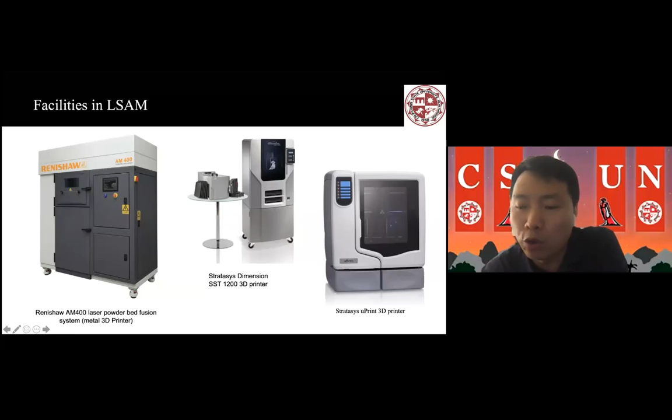This was funded by the DoD, a $500,000 grant, and then we purchased the Renishaw AM400. This is the metal 3D printer that uses laser, and then this is Stratasys Dimension, U-Print, all these different SLA printers, the ThermoJet, and also the desktop 3D printer.

I think that will be more familiar to you. Right now, from worldwide, a lot of universities have these desktop entry level 3D printers. And in the US, even high schools and middle schools have purchased these 3D printers for students.

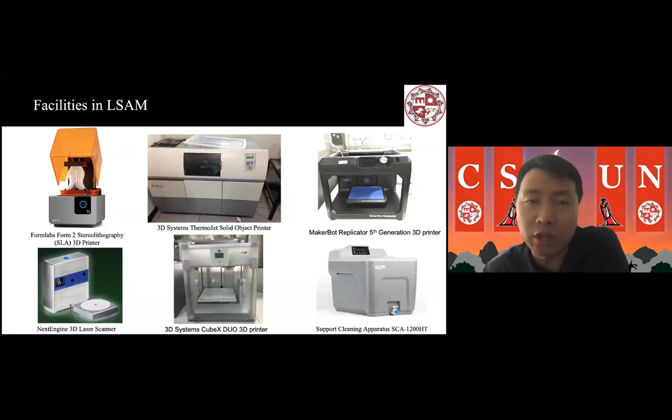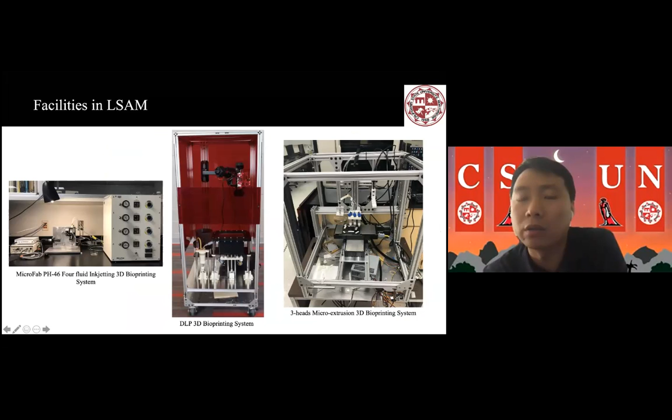For their projects. And these are the 3D bioprinters we developed in our lab, built by our students and my grants. So we just built these. You can see our 3D bioprinters from scratch, we designed and manufactured 3 different 3D bioprinters. And these are the equipment we purchased for my cell culture because I'm working on 3D bioprinting.

So we have to grow the cells and then put the cells in the hydrogel. I will show you details later, like how we are working on the 3D bioprinting. This is a new emerging research area.

Next, in my research I divided it into 2 sections. The first one is 3D printing, and design for AM. These are some of the grants supporting this research area.

I think you are students, most of you in industrial engineering major, right? Yes. Okay, all of us, IE students. So I think maybe you already have knowledge of 3D printing, additive manufacturing.

This is the definition. I think they have different definitions from different countries or different groups of people, but this is the definition of 3D printing from ASTM in the US. So typically AM means the process of joining materials to make an object from 3D model data.

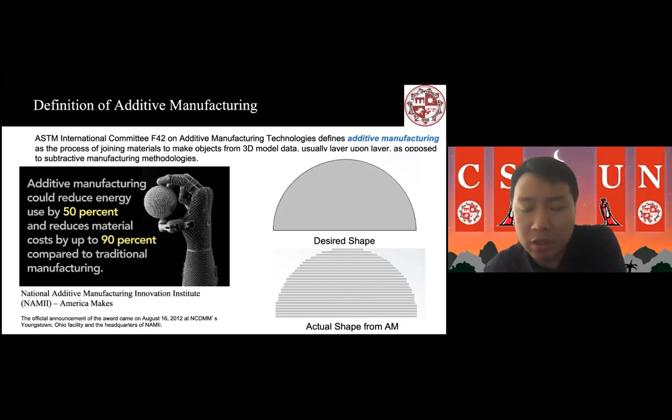Additive manufacturing has a lot of advantages. They can reduce energy by 50% and materials cost by 90%. So these are the different 3D printing technologies like inkjet-based, SLA, extrusion-based, SLS, FDM, the laser-based.

I think you may be familiar with them. If you're not, later in the Q&A section I can give you more details if you have any question about each of the technologies. But here I just want to give you a brief introduction.

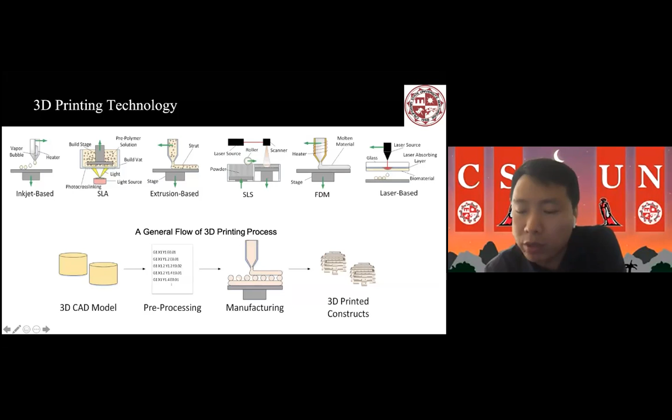The 3D printing process itself starts from the model. You build a model in different software, SolidWorks, CATIA, Autodesk Inventor, Fusion 360. Then there's the pre-processing, where they generate G-code, then the manufacturing process, and then the 3D printed construct.

So next I'm going to share all the projects that I'm doing, either that I have done or that I'm working on now.

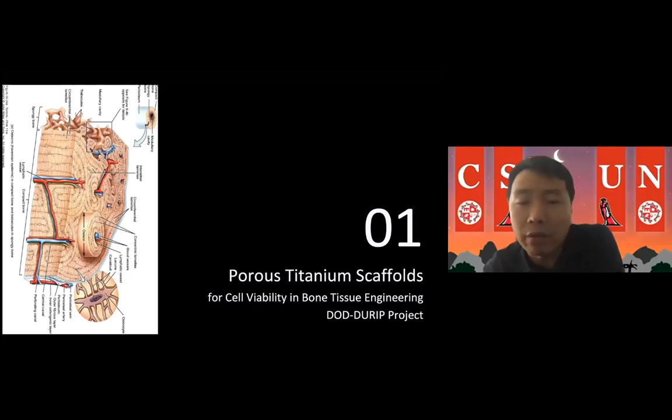To show the different projects, so you'll have a better idea of the current research in the United States, the first one is the most recent project in metal 3D printing: the porous titanium scaffold for cell viability in bone tissue engineering.

This is the bone tissue structure. You may be familiar with, or have a basic idea of, the bone structure, even from your high school biology class. The purpose of this research is to mimic or simulate the bone structure, especially the porosity.

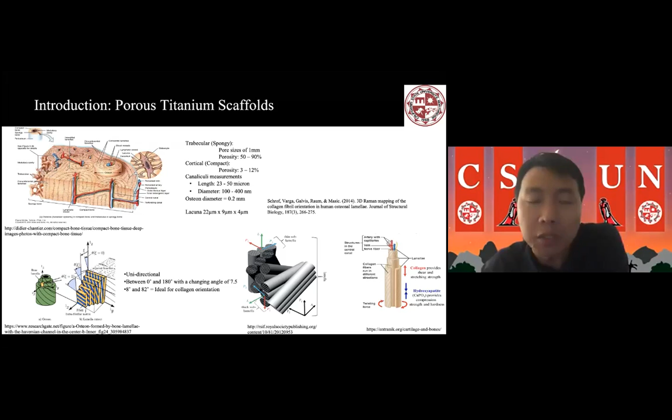Here you can see more detail, like the compact bone tissue, and the spongy, porous scaffold or porous structure.

Our design methodology uses 3D software or modeling to create structures with multiple porosities similar to human bone. I won't go into detail on how we chose 300, 400, 500, but if you have questions you can ask in the Q&A.

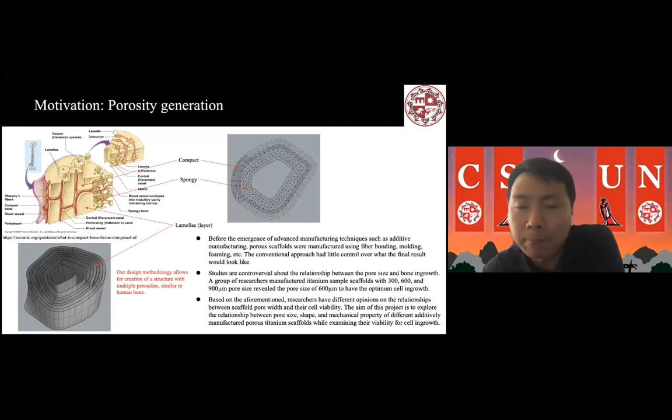Here's what we did: we designed in the software using Rhino and Grasshopper with IntraLattice tools to create these 3D geometries and structures.

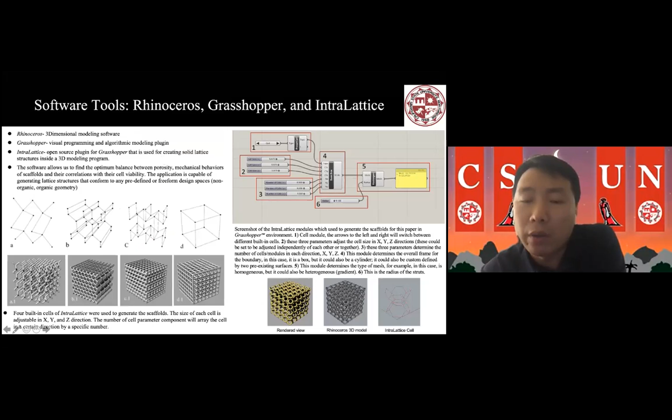Then we test them. We build them in the 3D modeling, picking different variables of the structure and scaffold. The pore size is 300, 400, 500 micron.

For cell geometry, we picked four types: diamond, honeycomb 1, honeycomb 2, and grid. Then we generate a 5 by 5 by 5 millimeter cube.

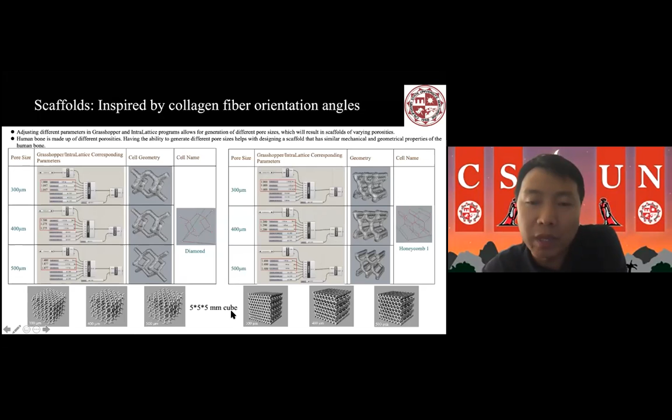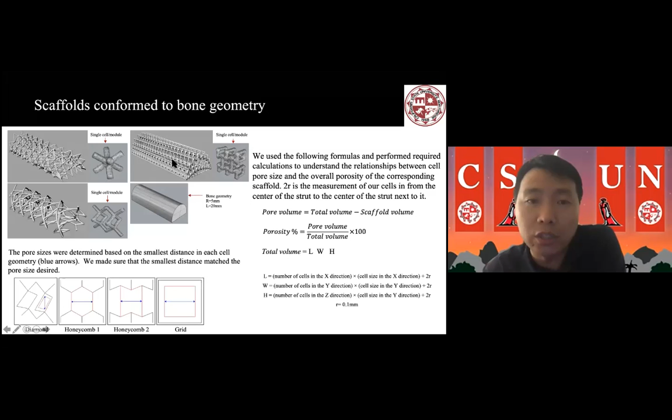We generate these different structures in the software, and also mimic the bone shape for this semi-bone shape. Then we calculate the porosity for each geometry, for each structure.

Then we use the metal 3D printer. Since my 3D printer hadn't been installed yet at that time, I used my partner's metal 3D printer, the Concept Laser M2, to print out all these different samples and scaffolds. I can show you more details of this later.

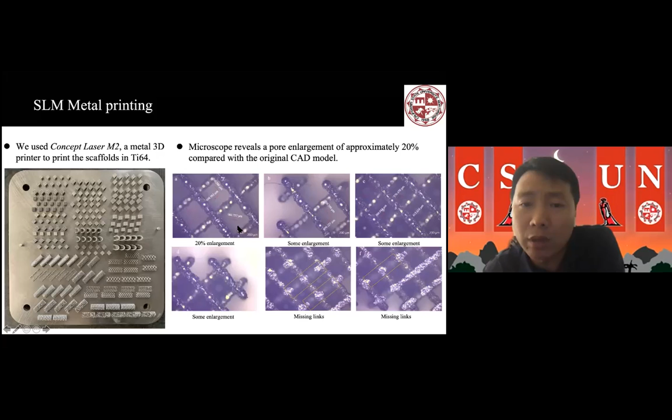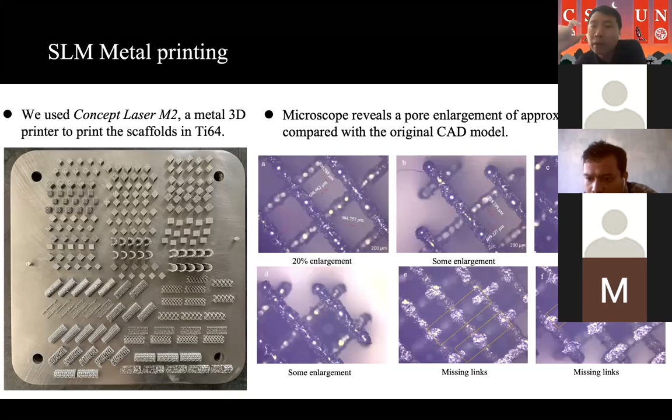We used a microscope to look at the structure and also the deformation, because slicing in 3D printing causes a lot of deformation, like enlargement and missing links. Here there's about 20% enlargement - your design is 300 micron, but the real size may be larger than that.

We also took SEM images to look at the internal structure at the micro scale, so we could understand the internal structures based on the build and fabrication.

You can see this is honeycomb 2, honeycomb 1, and you can clearly see some missing links and deformation. The initial shape in Rhino is a perfect, great honeycomb or diamond, but after printing there's a lot of deformation.

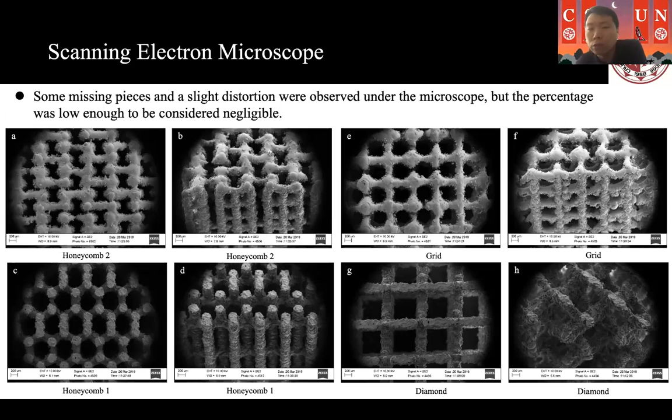But the reason we don't care about this rough surface is that it's for bone tissue - the cells will attach to the surface and grow into tissue, so we don't need a perfect surface finish for this project.

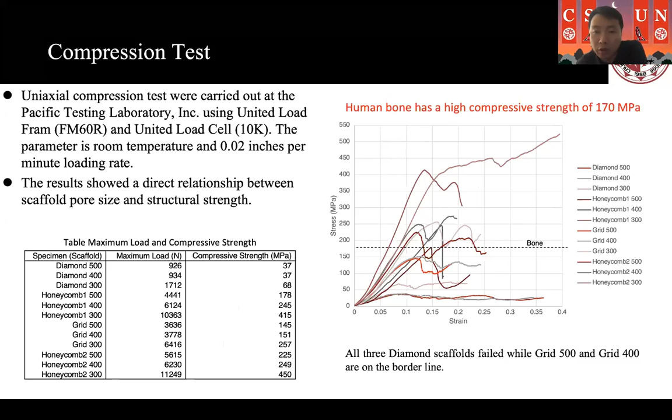Then we also added cells. The second step is to test cell viability, whether these cells can survive in this structure. We did the cell culture and tests.

So this is one of the projects - you can see the role of 3D printing in bone tissue engineering.

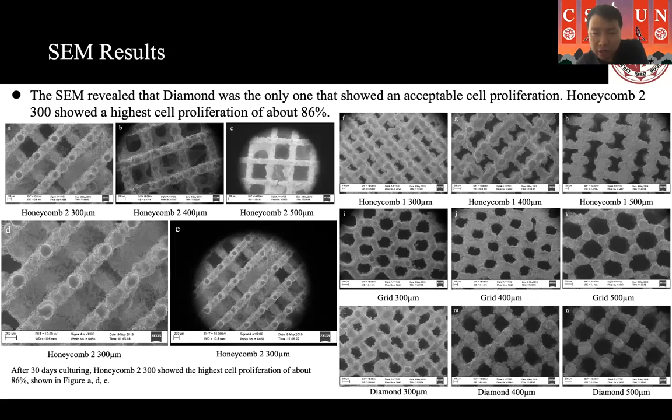The second project is funded by the NSF, granted by working with a local company. It's a Harley Davidson motorcycle, the most popular motorcycle in the world, especially in the US.

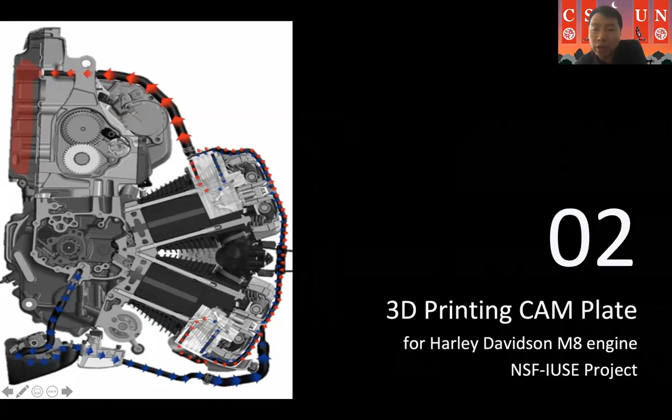So we're trying to get the 3D printing cam plate. This is the motorcycle, and this is the principle. We're trying to find an alternative fabrication way to make this cam support. The cam support holds the camshaft from this engine and facilitates oil lubrication from the oil pump.

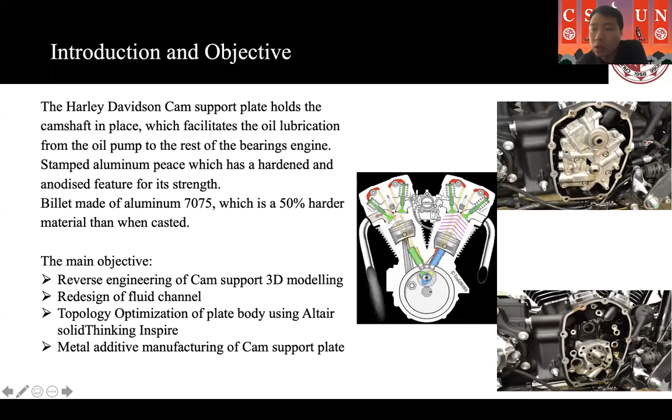What we did is we got this part from Harley Davidson, and then we did the reverse engineering. We used a 3D scanner to get the model into SolidWorks, and then we redesigned it. This is the old model, and then we redesigned it.

The original design is limited because of traditional machining - drilling, milling, and turning. So they have to make straight holes, like this one, otherwise you cannot drill these holes. But for 3D printing, it provides the potential to make a complex geometry.

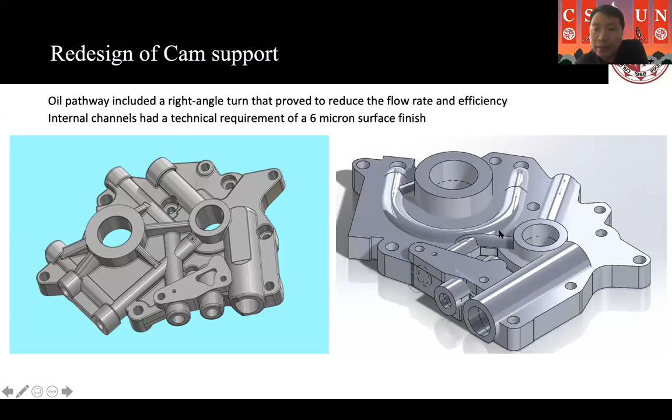Because these internal channels have bad fluid performance, we improved that by creating a curved internal pathway, so the oil will flow more smoothly inside the engine.

That's our idea. We also designed different shapes of holes, like circle, diamond, oval, and teardrop. The reason why - I'll show you later - is because the 3D printing technology itself has a disadvantage, since some structures will collapse. That's why we have to design this way.

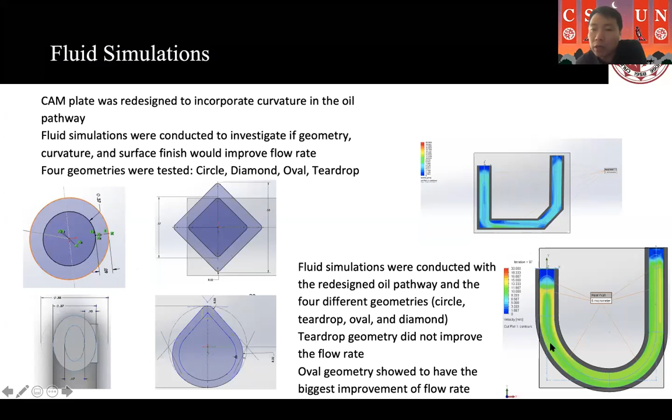We cannot design a perfect circle, because after printing they will deform and collapse. That's why it's been proven that teardrop and oval shapes are the perfect shape for 3D printing technology. We also did fluid simulation to check how much performance or efficiency we can achieve by changing from this sharp corner to a curved or circular shape.

We also did topology optimization. This is the new idea for lightweight design. For the critical parts, which we call partitions, and then all the other bodies can be reduced or changed to a meshed structure. This way we can save a lot of mass - that's the purpose of topology optimization.

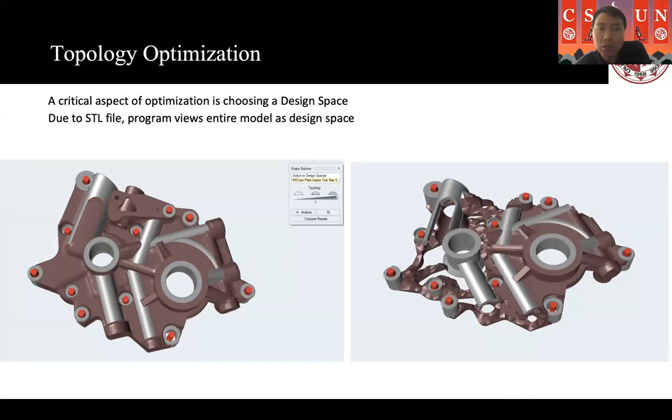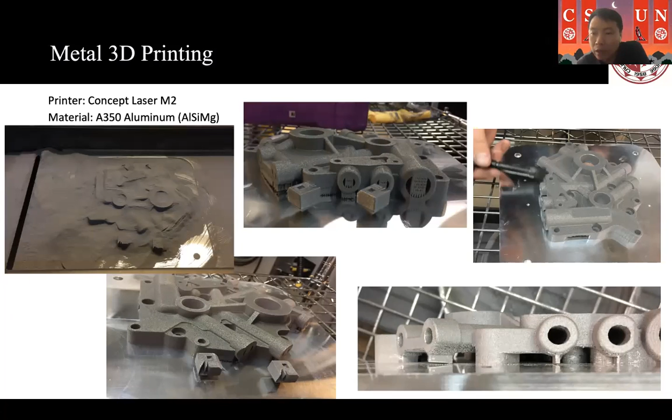Another project - this is for the class. This NSF project, we collaborate with Kansas State University and Texas Tech University, working to create a new curriculum in 3D printing, and we supervise students to do the project.

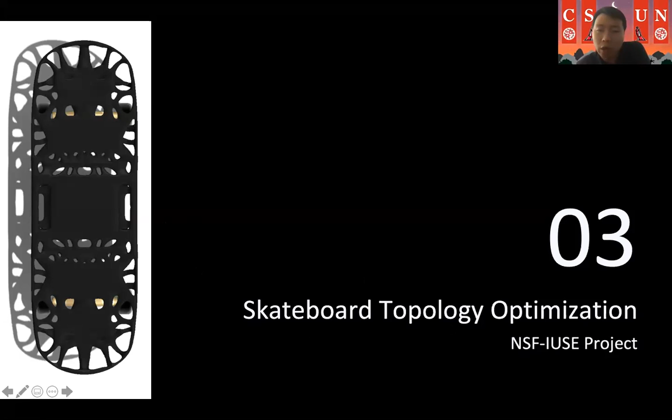This is a student project they did two years ago - a skateboard topology optimization. This is the traditional skateboard.

Topology optimization itself has been broadly used in two areas. One is aerospace, because lightweight design is the most critical criteria there - if you can save mass and weight, you can carry more equipment into space, for airplanes, satellites, aerospace, and NASA projects. Another area is architecture - you can see all these pretty fancy and cool structures.

Our purpose for this skateboard is to design and save a lot of weight - it's a lightweight design. We want to save over 70% of the weight, or reduce it by that much.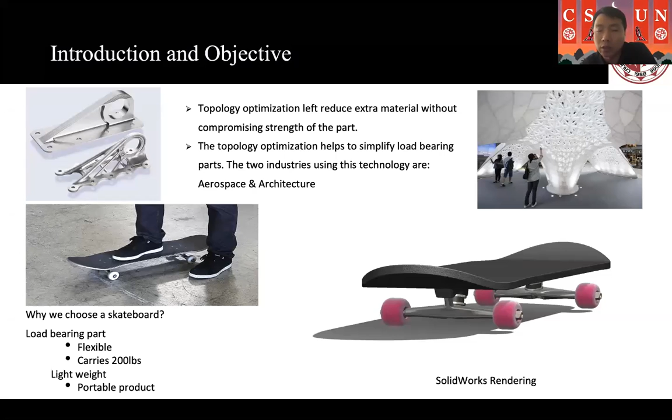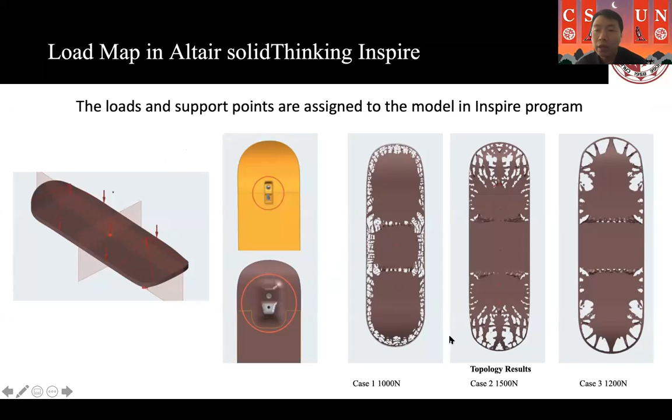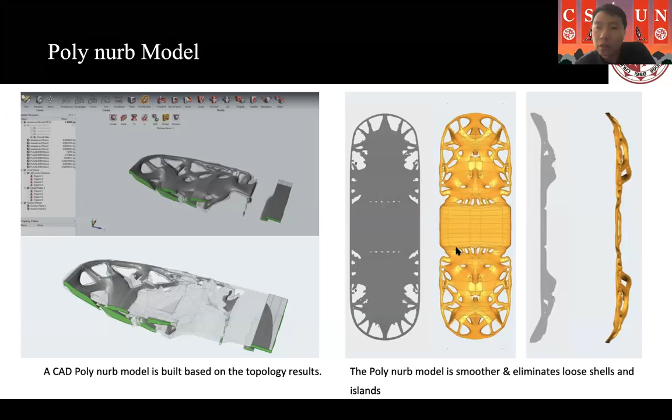We created the model and put it into the software, Altair SolidThinking Inspire. We ran it, set up the parameters, and eventually got these different Poly nurb models. They connect the structures and create a lot of mesh structure, the Poly nurb structure, to save materials and reduce weight.

And then this is the final result. We apply the different analyses showing the displacement and the factor of safety. And then you can see here, this is our final design. And then we print them out by SLS, selective laser sintering.

By using the material carbon fiber, we print out this sample, and it's pretty light. We saved, I think, almost an 85% reduction of the total weight for this project.

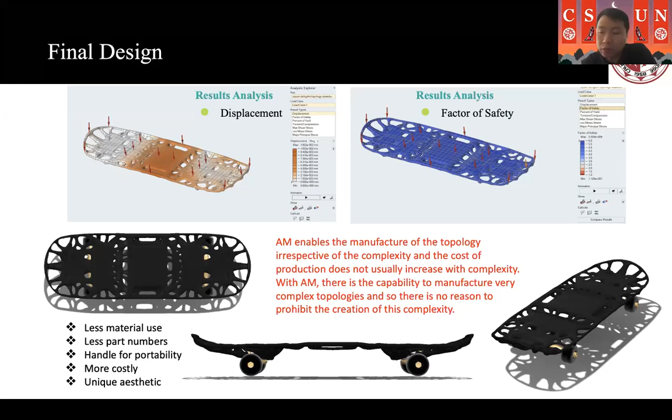So the second large area is smart manufacturing. That's the one I mentioned like 3 years ago. We got this grant from DOE, Department of Energy, for the clean energy smart manufacturing.

So I mentioned the America Makes, right? In the US, after 2008, because of the economic crisis, the US economy crashed. So the US government, Obama, the administration, initiated efforts to bring manufacturing back to the US and to make the US lead in manufacturing. So they established Manufacturing USA, with 14 Manufacturing Innovation Institutes, and America Makes is one of them.

And here, CESMII, I'm working on 2 of them. One is CESMII, the Clean Energy Smart Manufacturing Innovation Institute, because I've been working on energy efficiency life cycle. Another reason is this headquarters at UCLA is only 20 minutes' drive from our campus. So we joined as a member, working with them.

Another one is REMADE, reducing embodied energy and decreasing emissions. This is my area, like recycling, reuse, sustainable manufacturing. So I'm working with these 2 institutes now.

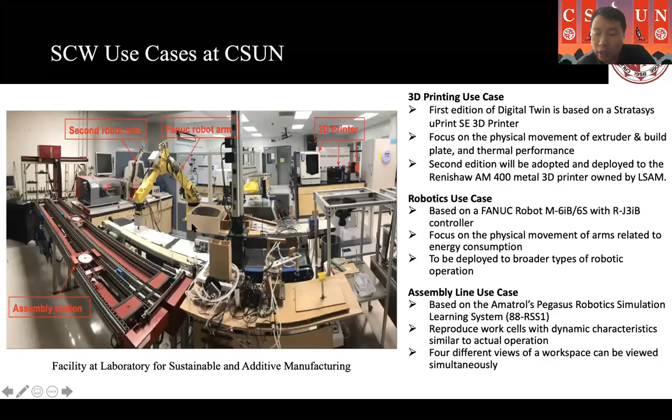We use different sensors like IoT devices, cameras—3 cameras—and a smart meter. We collect the data, collect the frames, and then process them. We use the YOLO object detection machine learning algorithm to detect the actions.

So next, you can see here's our machine learning model we developed, because we installed 1 camera inside the 3D printer, trying to monitor the motions inside. We target these 3 objects: the extruder, the build plate, and the axis. We're trying to use the machine learning, the YOLO object detection technology, to identify these actions.

And then linked to our energy profile, because our objective for DOE is to reduce about 30% of energy consumption for small and medium-sized manufacturing companies. And then the way is we have to figure out how much energy they consume, right?

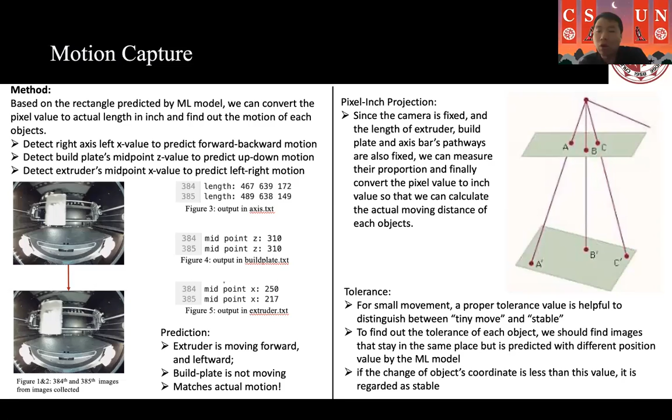And then we use motion capture, and eventually we found this one converges. We also use pixel-inch projection because from the view, the X, Y, Z coordinates are different. So we're trying to convert or transform the dimension and coordinates from your view into the real 3D coordinates. So this is the work we have done.

And this is the first version of the GUI. We are working on the second version. We put it online, it's web-based, so every user can log in and look at the real-time image of each machine. Then using this machine learning algorithm, we can tell the current machine state. We divide it into categories like testing, the...

select model, print support, preparing temperature, and then we also show the energy consumption. But this one is small. The second version can tell you more details for each channel of your electricity and each circuit. So it's more advanced.

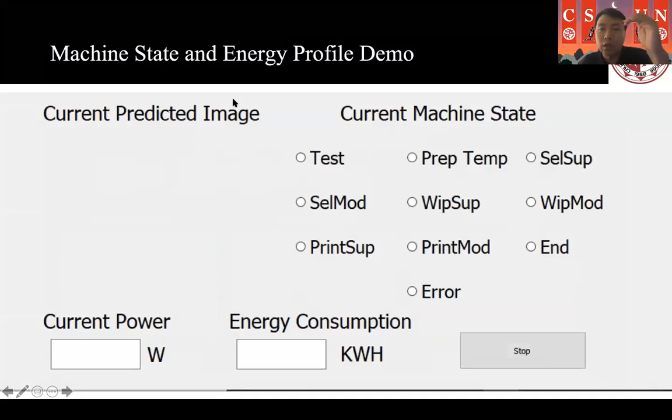So right now we are also working on the machine learning algorithm to identify the finger gesture and the text in the panel, in the display. There's another camera inside to monitor the machine. And here is how we tell these objects are moving, right? Then we can tell which state they are in now.

So next, I'm going to share with you the education section. The third section is the senior design project. After I joined CSUN, I have been supervising the senior design class or project for almost 5 years, starting from 2014 to, I think, 4 years to 18.

Because, as your chair Ferry mentioned, the senior design project is the most important project in the US. Every university with an engineering program really emphasizes a lot of effort, putting money and funding to support students in finishing the project. Since the senior design project is 1 year, we call it a capstone project, not one semester, it's a whole year project. Students typically design primarily in the first semester, then make the products in the second semester, and participate in different competitions, nationwide and at the university level.

So here I'm going to share all these different projects I have done. I think later on in the Q&A section, if you want, I can share more of my experience supervising this senior design project. This is the first senior design project.

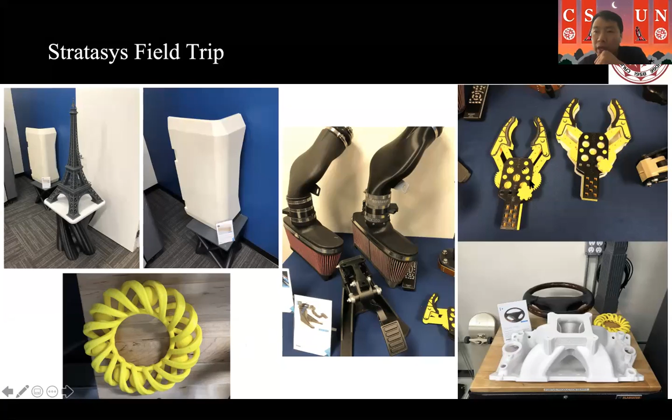These are their demos for different products - from large scale, like a scaled model of the Eiffel Tower in Paris, to self-assembly products. This one is a real functional part they made for a local company, for their vehicles, for cars. And this is tools they made for self-assembly, along with various other parts they make.

They also make shoes for Nike locally, and they have different colorful tools and objects, including colorful candy as well.

So this is my group of students - we visited this company, Stratasys. We also visited another company, a metal 3D printing company called Morf3D, about 2 years ago.

This company was a new startup, but they made all the parts for Boeing, SpaceX, Raytheon, Grumman, Northrop, and Lockheed Martin.

For different applications, you can see this complex geometry is for metal 3D printing. They can make amazing complex geometries for these mechanical parts. Most of these are just for demo, but these two are real mechanical functional parts used in industry, in aerospace.

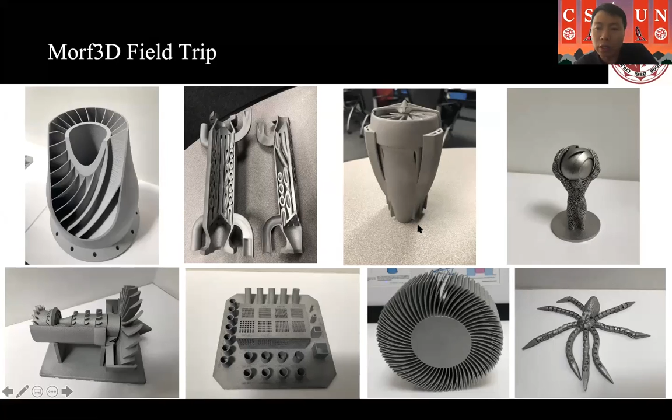They also have a large project for lightweight design - like this one for NASA. They redesigned these parts for satellites, saving over 79% on this one, and about 85% on this other part. So that's the new technology. I also brought a group of my students to visit this company.

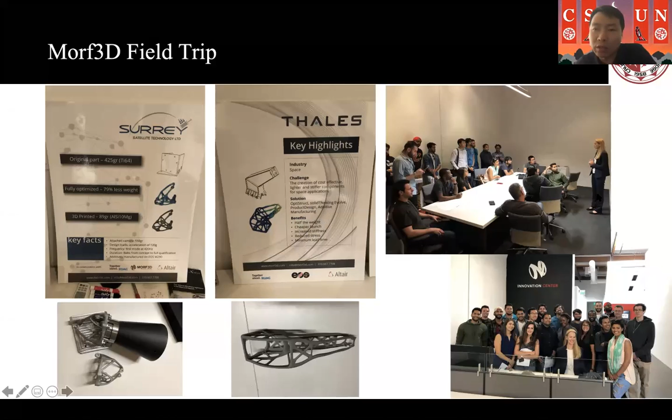And here is another CCPT grant outreach program. I host the Saturday Academy in digital manufacturing for local high school students. Students come on Saturday and take classes in 3D printing and SolidWorks, and after 12 weeks we give them a certificate. After this project and grant, we converted it into a regular class at the local community college, offering 3D printing and modeling for both college students and high school students. These are some other projects funded by AIM Square.

This is a student from the local community college, not CSUN's bachelor students. Here are some other outreach activities I have done in the past few years. This is an event because I'm also the faculty advisor for SME, the Society of Manufacturing Engineers. I think that's all for my presentation.